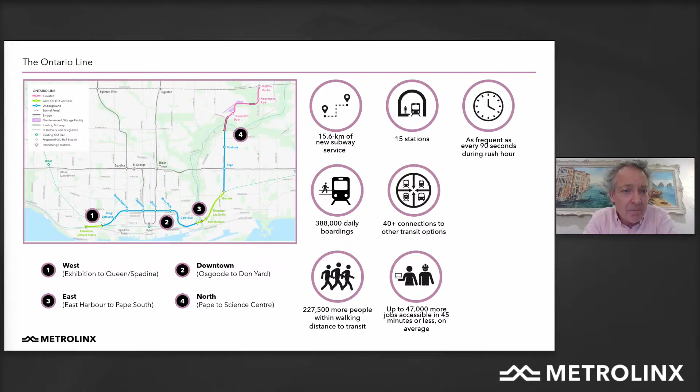Starting at the north end, we have Science Centre Station. We're expecting a peak hour ridership through here of 5,800 people. It's positioned on the northeast corner of Don Mills and Eglinton Avenue, so that in the future, if it's ever expanded, it can easily go further north. Next slide.

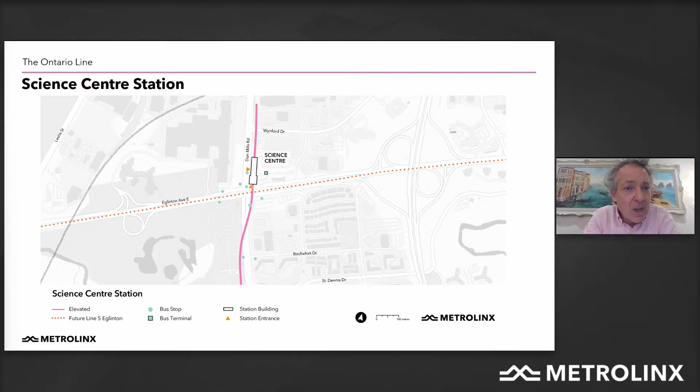The next station going south is Flemingdon Park Station. It's between St. Dennis and Gateway on the west side of Don Mills Road. We're expecting ridership here in the AM peak period of over

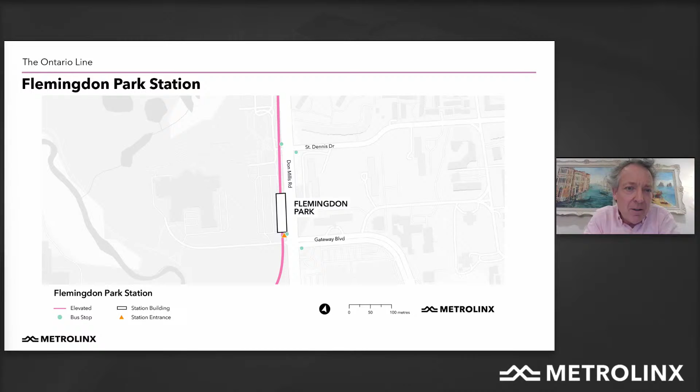2,800 boardings. As we come south and go across the Don Valley, we now come into the Thorncliffe Park area where we have a station on the north side of Overlea Boulevard. This is also the location of the maintenance and storage facility for the Ontario Line. Next slide.

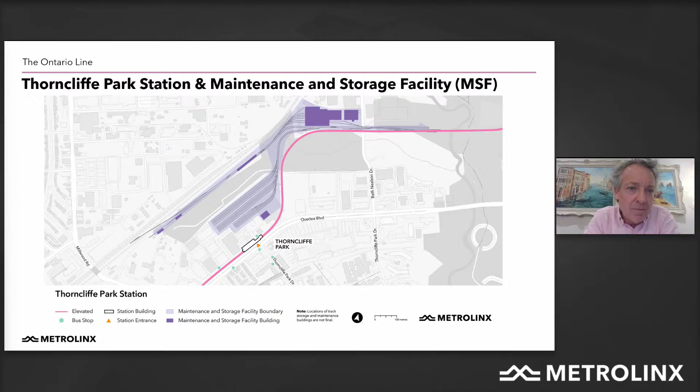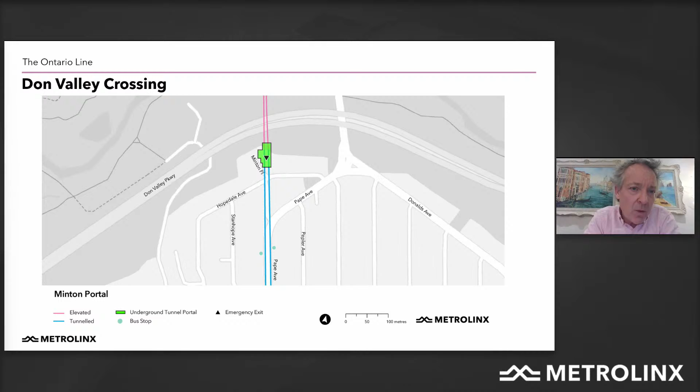As we go further south, we go back across the Don Valley and come into an area called the Minton Place Portal. This is where the subway line will go underground and continue south towards Cosburn Station. Next slide.

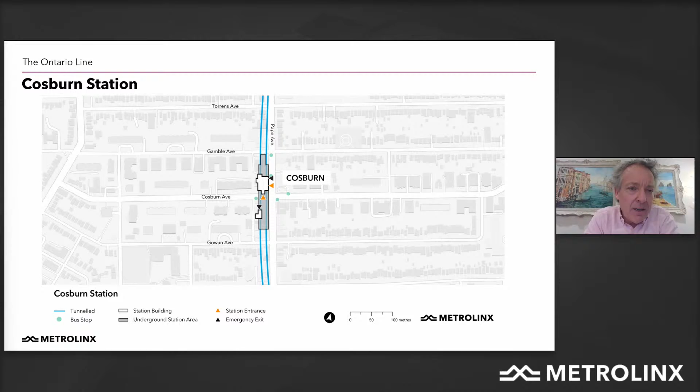Cosburn Station is going to have over 2,600 passengers through the AM peak hour, and it is located on the west side of Pape Avenue. We're actually building this station out of the roadway in order to minimize the construction impact to the roads, the vehicles, and the surface transportation network. Next slide.

As we head further south, we have Pape Station, which is one of the most important stations on the alignment. It is the interchange station with Line 2, where we will get the most benefit to our Line 1 ridership reduction at the very important Yonge-Bloor Station. So that is the congestion relief that the Ontario Line will bring for Line 1. At Pape, we're expecting over 10,000 people in the AM peak hour to be transferring through and arriving through this station.

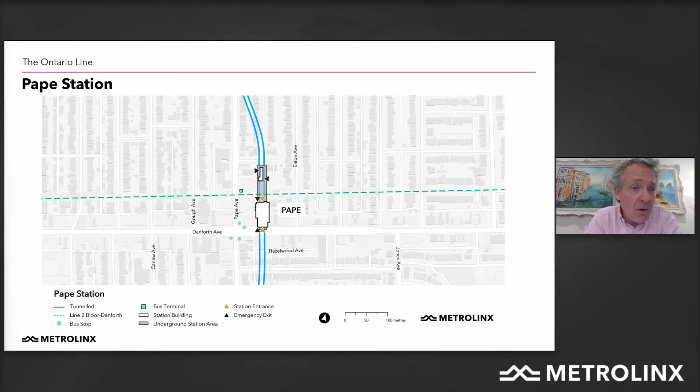As we head further south, we come to the Gerrard Portal. This is where the Ontario Line will come out of the ground and be above grade through the joint corridor south of here. And this is the limit of tonight's presentation material. Next slide.

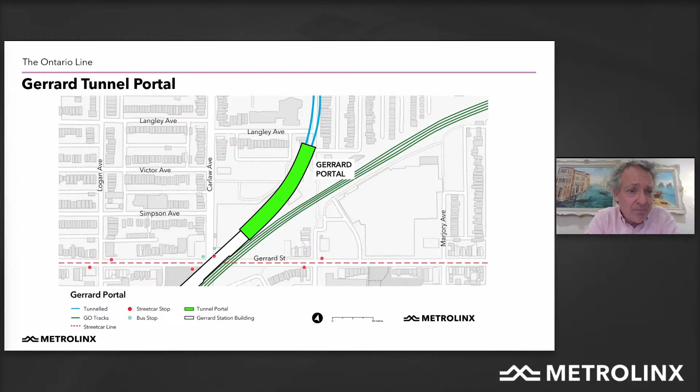So the project timeline, we've been in market for over a year now for our South Civils, Tunnels and Stations contract, as well as our Rolling Stock Systems Operation and Maintenance contract. We're expecting those to be awarded this year with construction beginning in 2023. Simultaneously, we will be tendering our North Civils, Stations, and Tunnels contract, and we're expecting construction for that to begin in late 2024. We currently have our environmental impact assessment report out for review, and James will be talking about that in great detail shortly. Next slide.

I'll pass it over to James. Great, thanks very much, Malcolm. So our environmental assessment work for Ontario Line has been well underway for the past few years. And for this work, we're following a project-specific environmental assessment regulation. This regulation and process is similar to the transit project assessment process, the typical environmental assessment process for transit projects, in that it requires study of the existing environment, consultation with interested parties, and identification of mitigation to avoid or reduce impacts of the project on the existing environment.

One way that the Ontario Line environmental assessment process differs from the typical process for transit projects is that it's phased. We completed the first phase of the environmental assessment, looking at existing conditions, back in 2020, when we published the Environmental Conditions Report. This report collected baseline information about all the typical environmental disciplines we look at in a transit environmental assessment, like archaeology, cultural heritage, noise and vibration, the natural environment, socioeconomics, air quality, traffic, and soil and groundwater.

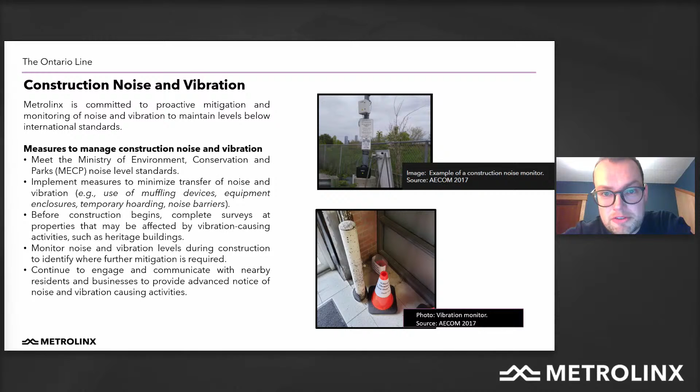We will also be continuously monitoring noise and vibration at all construction sites throughout construction to make sure it's being effectively managed, with additional mitigation brought into play as needed. The images on this slide show a construction noise monitor as well as a construction vibration monitor, examples of equipment we will be using once we're into construction. We'll also have a fully accessible phone line throughout construction and a responsive complaints process if any issues arise.

So we also model noise and vibration from Ontario Line project operations in the environmental impact assessment report, and that's to identify where mitigation is needed and most effective.

For the tunnel portions of the project, we've identified that vibration isolation to separate the subway tracks from the tunnel is needed to keep noise and vibration below perceptible levels. In some locations we're recommending a rubber system under the tracks, and in others a spring system. Each of these systems will effectively limit transfer vibration from moving trains to the tunnel, ensuring noise and vibration stay below perceptible levels at all structures.

On the elevated guideway, where the Ontario Line is above ground, since the trains will be quiet, electric, and automated, the sound of train movements will integrate well into the existing ambient noise environment. In most locations near the elevated guideway, existing road traffic noise is louder than Ontario Line trains, so mitigation like noise barriers isn't warranted or needed to meet regulatory limits.

That said, we are committed to installing noise barriers along Overlea Boulevard between Millwood Road and Thorncliffe Park Drive, as well as at the maintenance and storage facility. This will reduce noise levels below applicable limits. We're committed to ongoing engagement on the design of these noise walls, to make sure their look and feel integrates well with the surrounding neighborhood as planning and design progress.

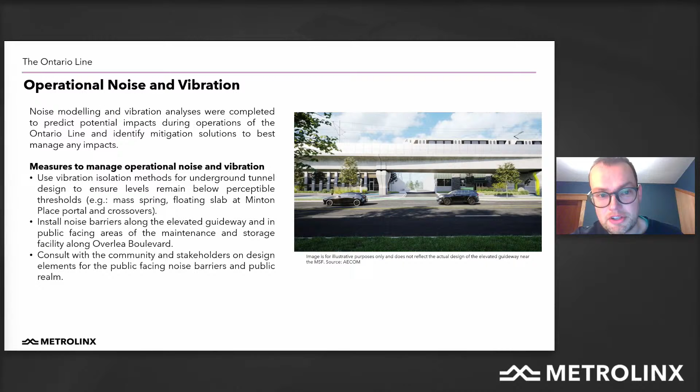We're very aware of the cultural heritage resources along the route of the Ontario Line, and we're working to avoid impacts to heritage properties wherever we can, while still accommodating the best transit solution.

We do need to relocate utilities in the valley near the Middle Mill to accommodate Ontario Line, and we're planning this relocation to avoid any direct impacts on the remaining heritage features here. These are only two of many heritage resources in this area of the study area for Ontario Line.

The EIAR commits to mitigation for impacts at each of these potentially affected heritage properties. Where heritage impacts are unavoidable, we're continuing to work closely with the city's heritage planning staff and staff at our regulator, the Ministry of Heritage, Sport, Tourism, and Culture Industries, on plans to document and salvage heritage attributes, to commemorate and interpret heritage sites, and to design nearby Ontario Line infrastructure in compatible and sympathetic ways.

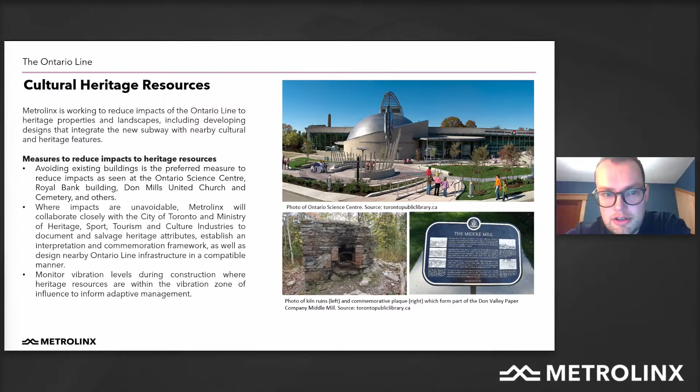In terms of archaeology, most of the study area between Gerrard and Science Centre stations has been previously cleared of archaeological potential due to past disturbance. There are no known archaeological sites in this portion of the study area. We will be completing additional archaeological assessments this spring and seeking archaeological clearance for all construction areas prior to construction.

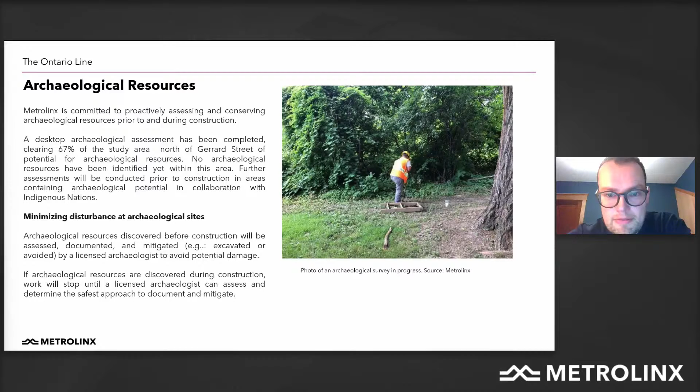We also look at socioeconomic and land use impacts in the Environmental Impact Assessment Report. In terms of mitigation, we commit to maintaining access to businesses, parking spaces, and recreational spaces throughout construction, and engaging with the city and local communities on public realm elements like the look and feel of future stations and public space under the elevated guideway as design progresses.

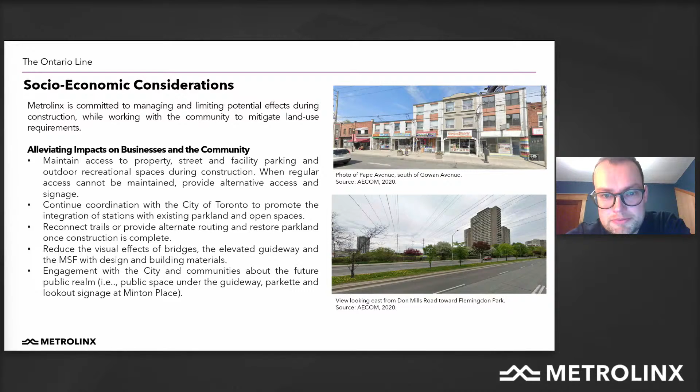The EIAR also assesses impacts to traffic and transportation as a result of both project construction and operation. To maintain traffic flow, we commit to a road under rail grade separation of Beth Nealson Drive, uninterrupted operation of the bus station at Pape Station and the future bus station at Science Centre Station, and staged construction of the crossover between the tunnels under Pape Avenue near Salmon Avenue. Other mitigation we've committed to includes maintaining access to businesses and loading docks, as well as safety routes for pedestrians and cyclists wherever those may be required.

I'd like to turn it over to my colleague Jesse now to take us through the findings of the remaining environmental topics that we've assessed in the EIAR.

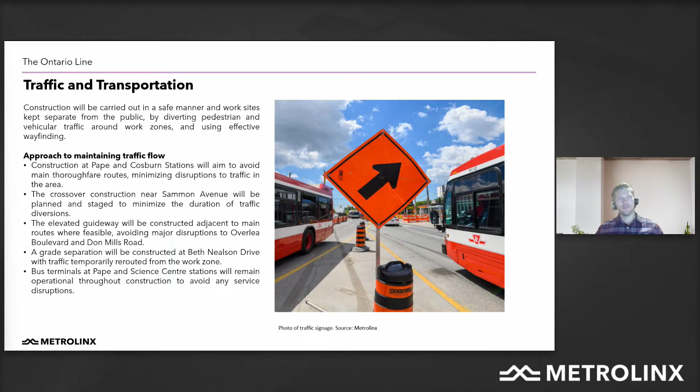For the natural environment, we assess natural areas like significant woodlands and wetlands, fish and wildlife habitat, and species at risk. Our subject matter experts first reviewed existing information from the Environmental Conditions Report and also from agencies like the Toronto Region Conservation Authority and the Department of Fisheries and Oceans Canada. We then supplemented this available information by completing field surveys of plant communities and wildlife habitat, particularly in the Millwood Road and Walmsley Brook areas. Our team then overlaid project designs within the study area to identify any potential effects.

We recognize that green space and parklands are limited resources in the city, and with this in mind, we are working to refine our designs to minimize tree removals and protect trees wherever we can. That being said, the project will need to remove some trees in order to accommodate safe work zones during construction and to allow for new infrastructure.

Where tree removals are required, we will take a surgical approach, protecting surrounding trees with barriers and performing removals outside of sensitive timing windows for wildlife as much as possible. We will compensate for all tree removals in accordance with city permitting requirements and following Metrolinx vegetation guidelines, ensuring a higher degree of compensation for natural areas and planting many more trees than we remove. We are also working with the City of Toronto and Toronto Region Conservation Authority to identify local compensation opportunities and tree planting locations to help offset any required removals and contribute to ecosystem revitalization in the Don Valley.

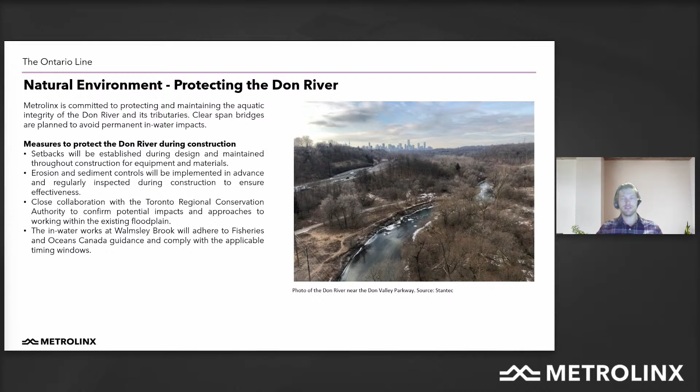Our commitments to protecting the Don River include establishing and maintaining construction setbacks from the watercourse, performing in-water works within applicable timing windows to avoid impacts to fish and their habitat in order to install tracks into the maintenance and storage facility at Walmsley Brook, and installing erosion and sediment control measures beforehand, regularly inspecting these measures throughout construction to prevent sediment runoff. Lastly, we will continue to work with the Toronto and Region Conservation Authority to incorporate flood protection measures as we advance planning and designs for works in these areas.

Existing soil and groundwater conditions were assessed using available information to identify potential effects, mitigation measures, and monitoring activities during construction and operations. Further geotechnical and due diligence investigations ahead of construction will confirm existing conditions and also inform project designs to ensure potential impacts to soil and groundwater are avoided or mitigated.

We commit to proper handling and management of soil and groundwater during construction in accordance with all regulatory requirements and approvals. This includes the new excess soil regulation, as well as requirements pertaining to contaminated soils and dewatering. Once construction is complete, we do not anticipate any long-term impacts during operations of the Ontario Line.

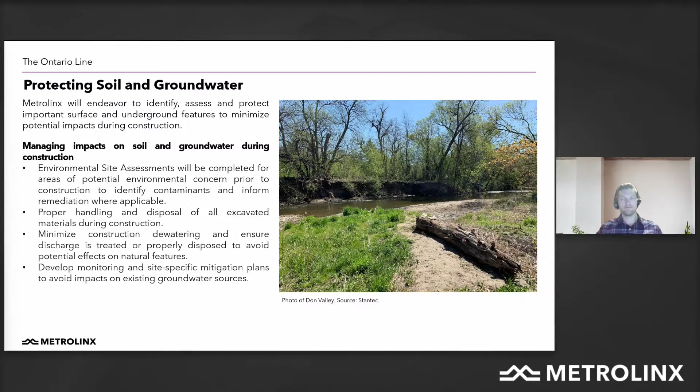We assess potential impacts to air quality for both construction and operations as part of the Environmental Impact Assessment Report. The Ontario Line features electric trains that will improve local air quality by reducing direct emissions and taking cars off the road. Potential operational impacts on air quality are expected to be minimal and mitigated by implementing an air quality management plan for the maintenance and storage facility and at stations.

Potential impacts during construction will be avoided through active monitoring and mitigation, including the use of dust suppressants, covering of stockpiles, using wind screening, and the implementation of proper excess soils and materials handling and equipment washing procedures.

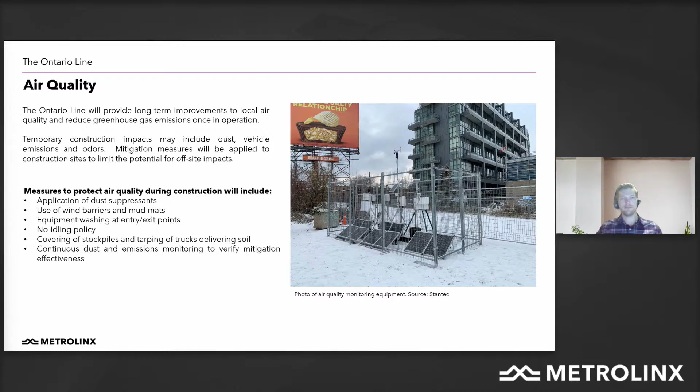As many of you are already aware, the draft Environmental Impact Assessment Report is now posted on our webpage for review and input until March 9th, after which public inputs will be reviewed and addressed ahead of publication of the final EIAR in April 2022. Public engagement for the Ontario Line Environmental Impact Assessment Report will continue to take place over the coming weeks, including virtual open houses next week on March 1st and 3rd, which will outline the project from Gerrard Station to Exhibition Station.

And with that, I'll now hand the mic over to Vicky, who will provide further details on our property requirements for the project. Thanks so much, Jesse. The next two slides relate to our notification to property owners.

If property is needed for the project, owners will receive a letter, and there are different ways that properties can be impacted. The project may need some or all of the site permanently, such as for the construction of a station, or the need may be underground only, such as for the construction of the subway tunnel or to support that subway tunnel. The permanent need may be an easement, which relates to needing a partial interest or access only to lands, as opposed to full ownership of the property.

Sometimes Metrolinx may have a temporary need to use the land for a fixed time, and after that construction is completed, the lands will be restored to the same condition or better.

Whether your property is impacted permanently or temporarily, or part or all of it, receipt of a letter is just the beginning. We would like to meet and speak with you directly to explain details such as how much of the property is needed, why, what to expect in terms of timelines, and answering your questions. We want to ensure that you have as much information and support as possible.